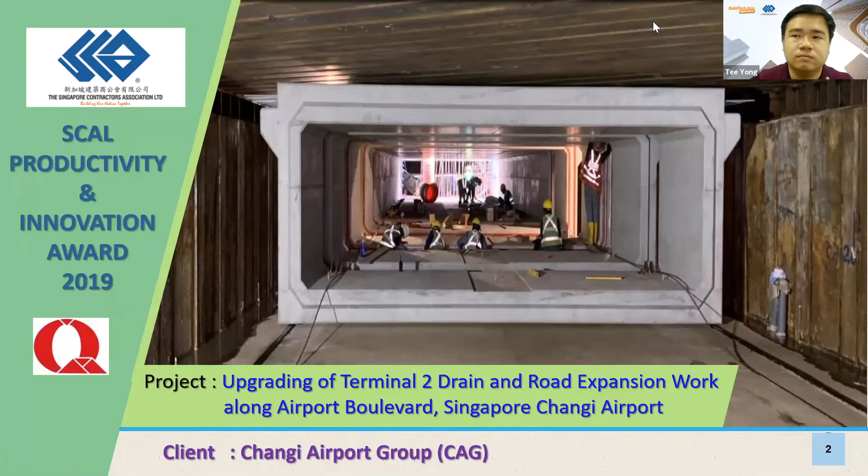So for this project, we are actually constructing a box culvert across Airport Boulevard. This is the plan view of the box culvert construction. We are supposed to construct a box culvert along both the city-bound and airport-bound directions.

So this is the length of the box culvert, which is about 51,100 mm across, going towards the direction of the airport and the upcoming Jewel during that time.

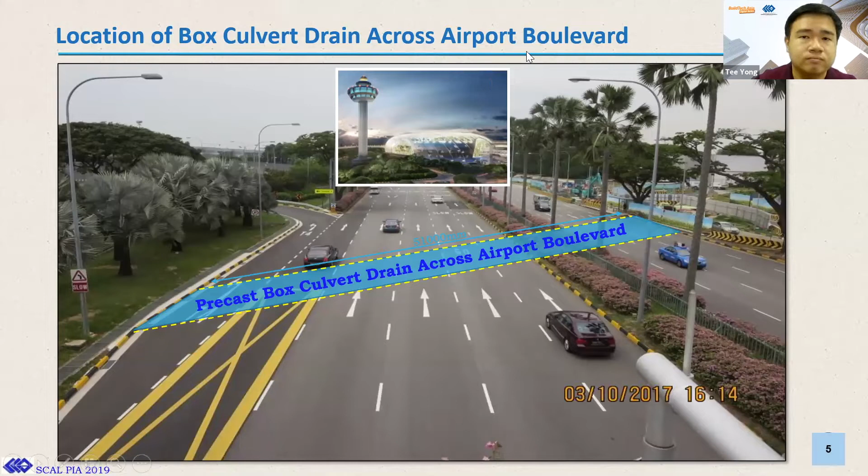So the first initial method was using the consultant proposed method, which is the conventional way to construct. In this design, it consists of a lower part precast box culvert followed by an upper part box culvert installation. The top of the culvert is actually higher than the existing road level for this design.

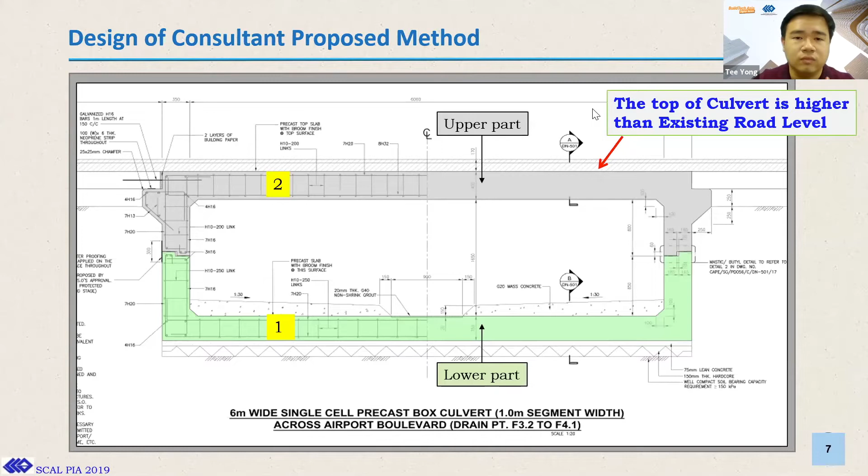So by using this conventional method, we are supposed to do the installation of temporary decking, followed by the removal of decking for excavation, and then proceed with the excavation to required level. Then the delivery of the lower portion of the box culvert, followed by backfilling, and then we proceed with the installation of the top section of the box culvert.

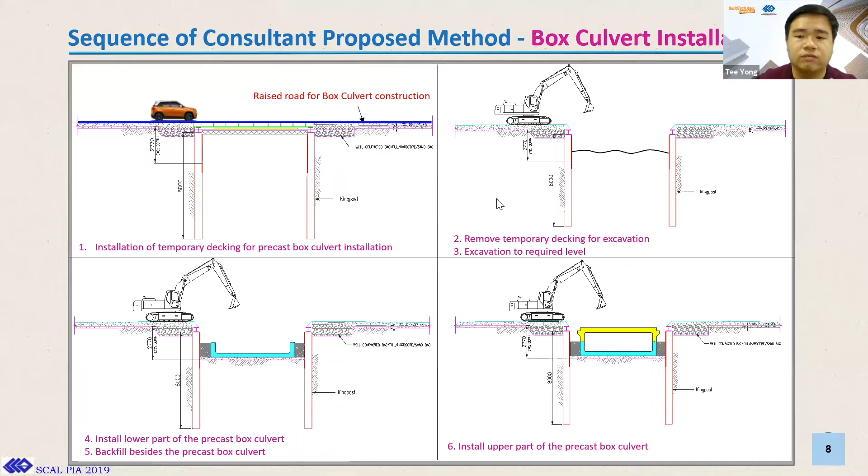Next, we will proceed with the placing of the back decking system to open up lane for traffic, and then laying of premix over the decking. And then we follow by removal of decking and premix to continue work and backfill to the approach slab level.

During this portion, it is the most intense and time consuming due to the opening and closing of the traffic to allow for the next day operations. So this is part of our constraint for this project.

So on the last portion, after the completion will be the removal of the king post and steel plate, followed by the installation of the approach slab, and then the reinstatement works, which consists of the milling, patching to proposed level.

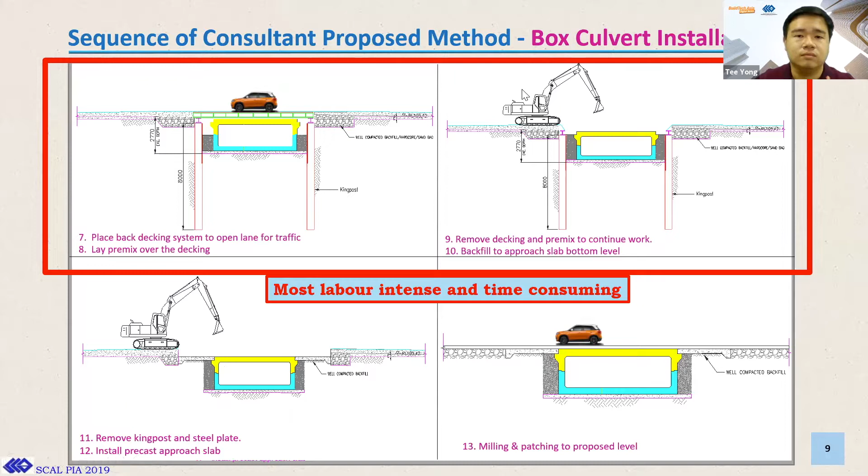Okay, so some of the challenges that we are facing, we have 4 main challenges if we are using this conventional method to construct the box culvert across along this airport boulevard.

First will be the repetition works, which we require to remove and reinstall back premix and decking, and follow, as we need to follow the permissible lane closure and lane open timing to maintain the traffic flow.

Next will be the allowable lane closure timing, which is restricted, given to us. For day works, we are only allowed from 10 a.m. to 4 p.m. for work, and for night works, we are only allowed from 1 a.m. to 5 a.m. So due to all these restrictions, there is a lot of repetition works required during our construction works.

Next will be, if you look at the layout plan, this drain alignment is actually not perpendicular to the existing lane. So by using this method, we are affecting not just one lane in order to construct one box culvert. By constructing one box culvert, we actually require to close more than 2 or 3 lanes.

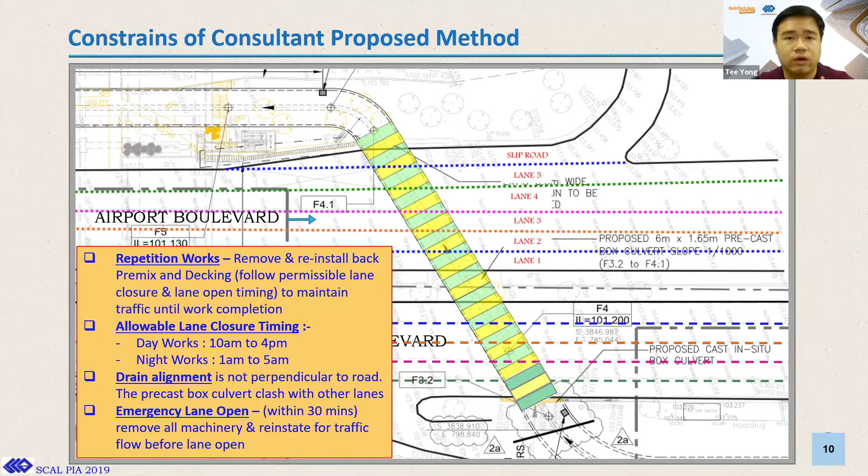And the last point will be the emergency lane opening. We actually have to open up the lane within 30 minutes in case of emergency. So removal of machineries and reinstatement work for traffic flow before the lane opening will be a big challenge to us as well if we continue to use this conventional method.

So we have plotted up a graph to analyze our challenges. In terms of method, if we proceed to use the conventional way, the impact will be due to the small work window allowed by our client. And in terms of environmental, we are only allowed to close 2 lanes at any one time. So this method will not be feasible for us.

In terms of machinery and manpower, it will be a challenge to us also, as using this method will require us to do a lot of repeated steps for the opening and closing and the reinstatement work, as we need to reinstate the top layer before we are able to open up to the traffic. So all in all, if we proceed with this method, there will be impact to the existing traffic and also operations going to the Changi Airport and the upcoming Jewel during that time.

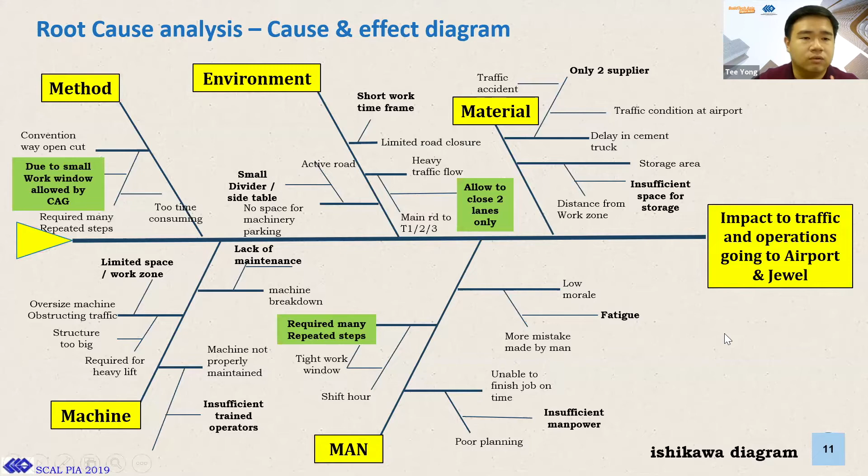So we analyze the root cause. We input 4 main points mentioned. The root cause will be restricted work windows given by our client, as this airport boulevard along this road is a very important stretch going towards the airport. And for these works there, we are only able to close up to 2 lanes.

And due to the repetition works, road closure is also a big challenge to us. And we are also subject to airport emergency. We need to evacuate within 30 minutes so as not to affect the traffic flow. So all these 4 main points are a main challenge for us, and the undesired outcomes will be delay to the upcoming Jewel opening during that time, and we will be facing LD from client and poor productivity.

So we have come up with a solution, which is to abort the conventional method and avoidance of above ground works, and explore an underground method. What we have come up with is an innovative method, which is the pull and rail method. By using this method, we have no restriction to 24/7 operations, so we are able to proceed with excavation works and installation of precast without being affected by the restricted work windows and closure timing.

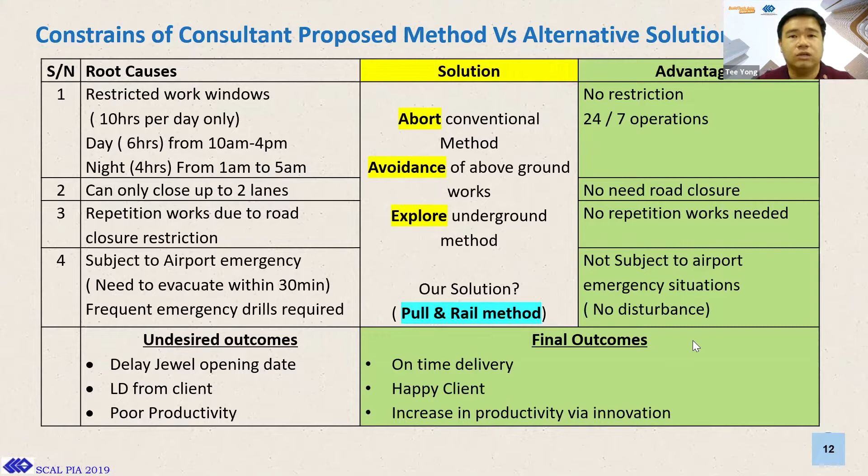As mentioned, no need for road closure, no need for repeated works, and not subjected to airport emergencies. The final outcomes will be on-time delivery and satisfaction from client, and increase in productivity through innovations.

So let us go on to our innovative method. This is what we have come up with, which is using this pull and rail sliding method for our full cell box culvert. The previous method was actually a lower portion and upper portion precast box culvert, but this time round, instead we are using a full cell box culvert, which also helps us increase our productivity.

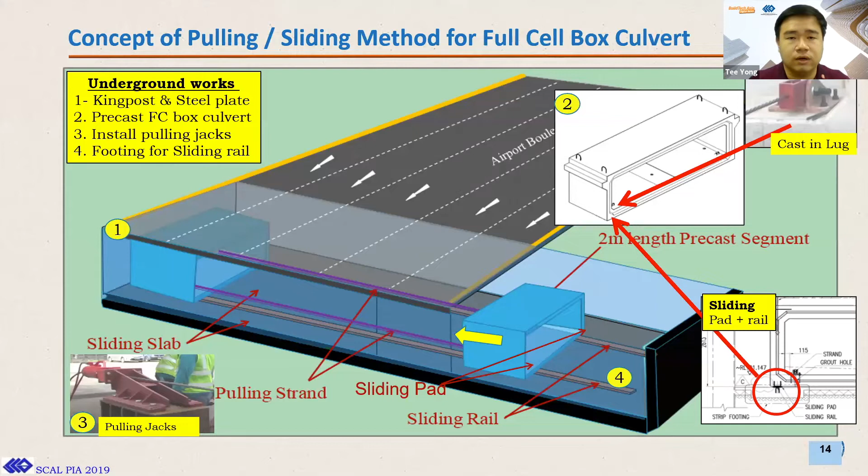So the first step will be the installation of the king post and steel plate, followed by number 2, which will be the precast box culvert, delivery of the box culvert to site to the receiving shaft. And below the ground, we will be doing the installation of the pulling jack and preparing the footing for the sliding rail. The next few slides will explain how these things work.

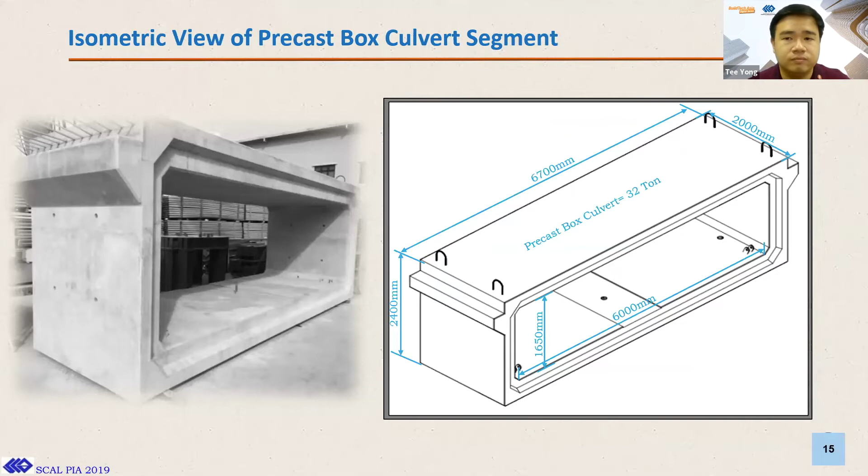So the box culvert segment is 6700 mm by 2400 mm. Each piece of precast box culvert is estimated to be 32 tons. Similarly, this box culvert's top is actually higher than the existing road level, so our temporary works are actually much higher than the existing road level.

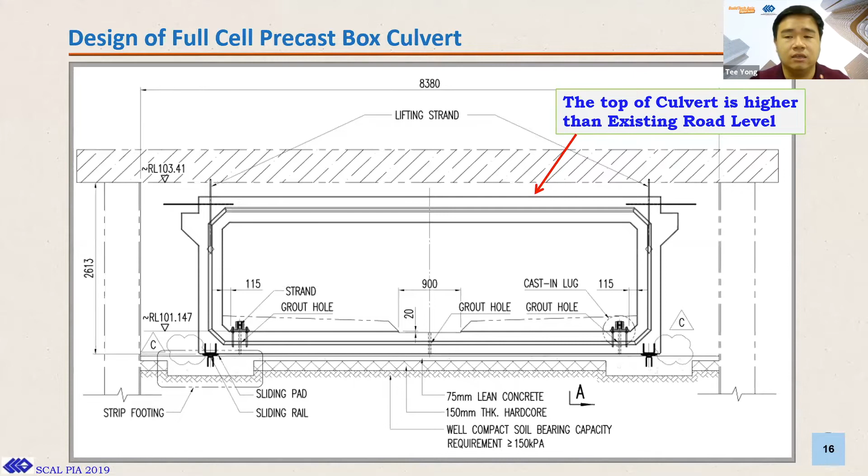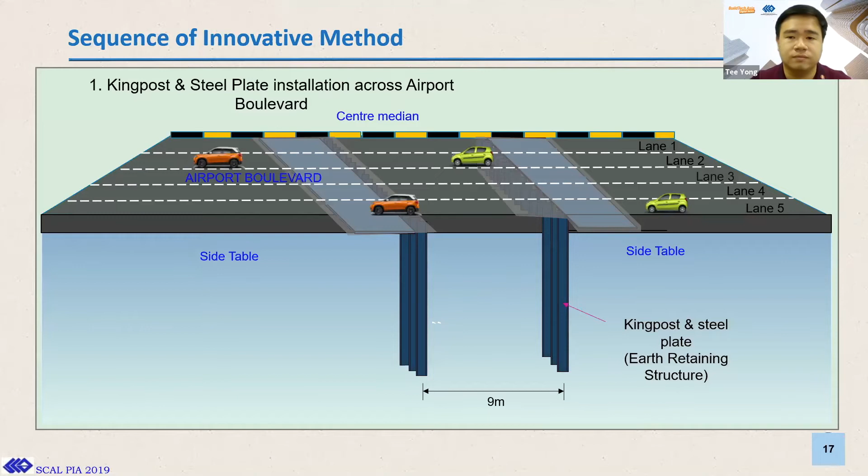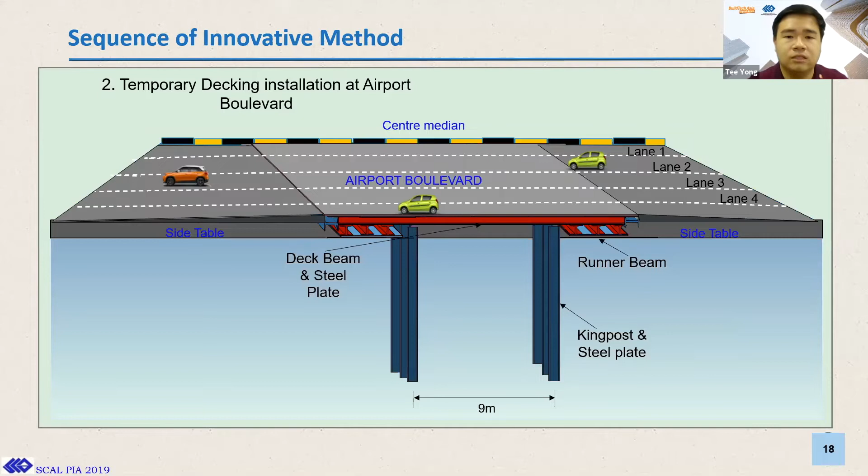After the installation of the king post and steel plate, we will proceed with the installation of the deck beam and steel plate and runner beam at the top. Once we complete this portion, we are able to do our excavation under the ground and also proceed with the installation of the box culvert, without affecting the existing traffic flow anymore.

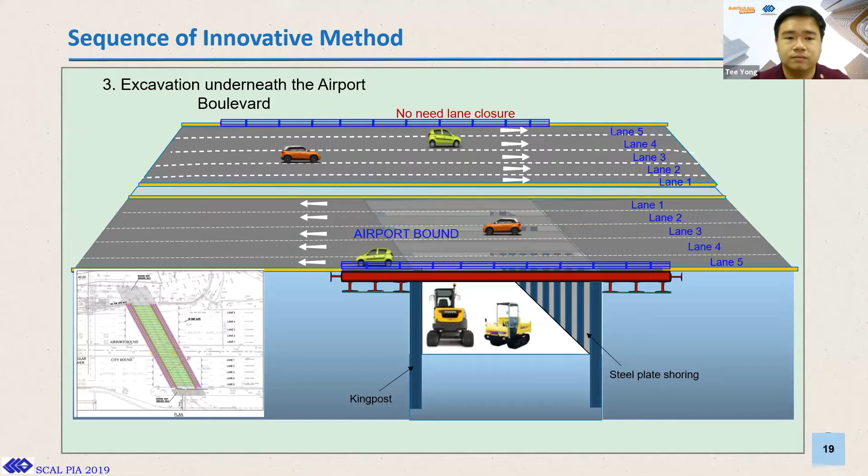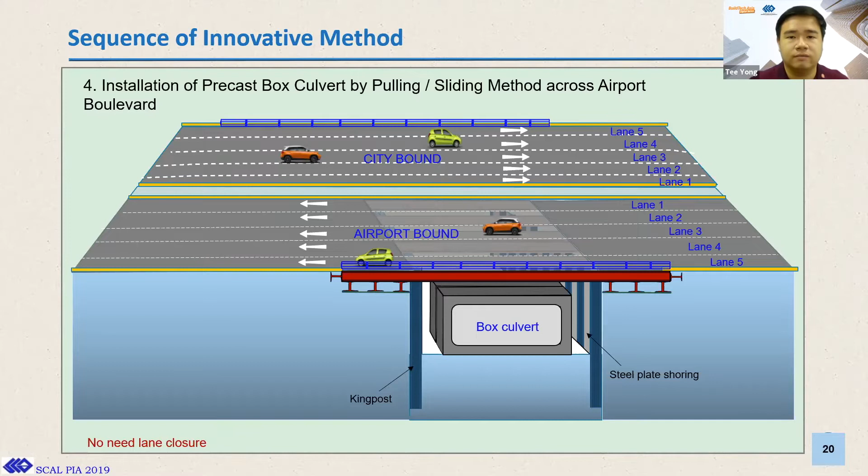So once the box culvert is delivered to the site, it will be placed down from the receiving shaft and then pulled in using the sliding rail and pulling jack. Once it's complete, we will proceed with the removal of the steel plate decking and then complete the reinstatement works.

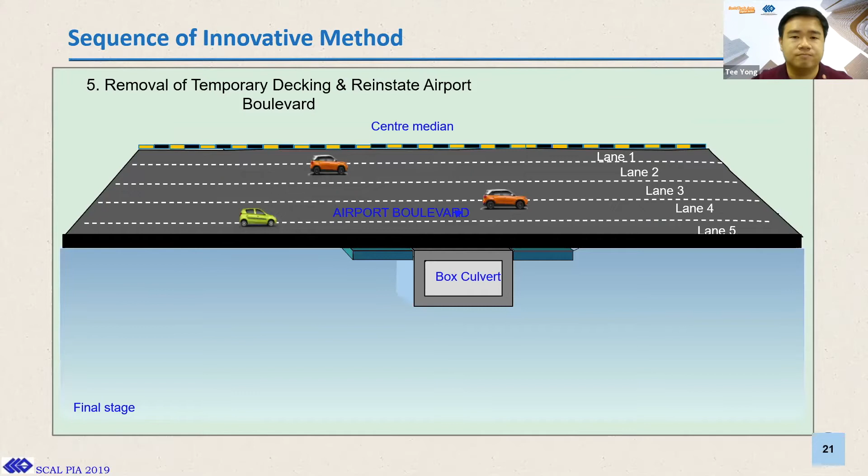So let us do a comparison of the consultant proposed method and our innovative method. As mentioned, the 4 main points: by using the conventional method, there will be repeated steps. But by using our method, the decking and premix is only installed once and there are no repeated methods as the opening of decking is no longer required.

By using the conventional method, we actually have to open up and close even for the excavation and for the placing of the precast segment. But by using this innovative method, after we install the decking, we no longer have to open up the decking as we can do our works underground.

So the next point will be the lane closure timing. If we are using the conventional method, we are restricted. But by using this innovative method, works is carried out beneath the road and we are not restricted by the lane closure timing anymore during the excavation and the installation of the box culvert.

For drain alignment which is not perpendicular to the lane of the road, box culvert installation must not overcross the lane with traffic next to it. But by using our innovative method, the installation of box culvert fitting within the lane width is not required because we are doing our works underground. Similarly, for point number 4, we are not restricted as we will not be affecting the ongoing live traffic flow.

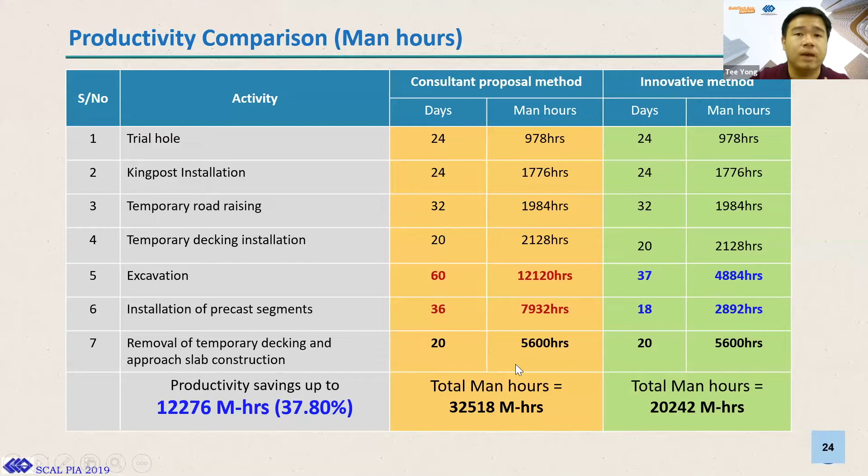Next, we will go on to asphalt saving. Similarly, for point number 5 and 6, if we are using the conventional method, we have to open up and close back the decking, and then do the reinstatement work every day in order to proceed with the excavation and installation of precast segment. But by using this pulling rail method, the excavation and installation of precast segment does not require us to open and close the top decking, so this portion does not require reinstatement work. Therefore, for this portion, we do not require any asphalt here.

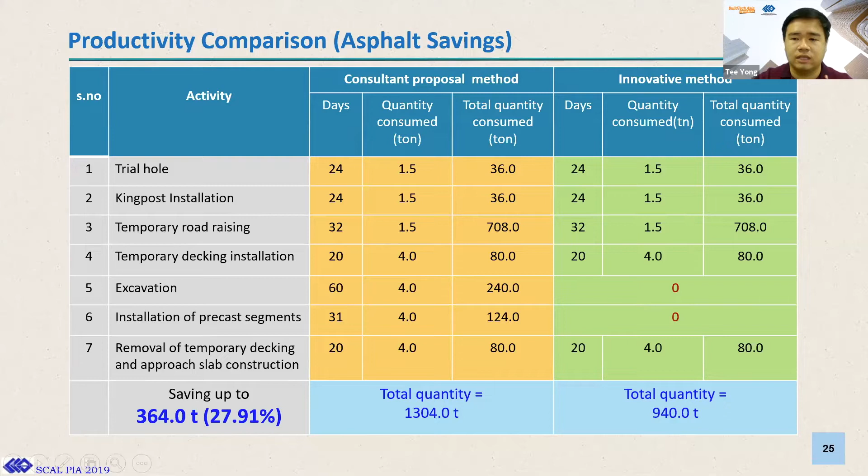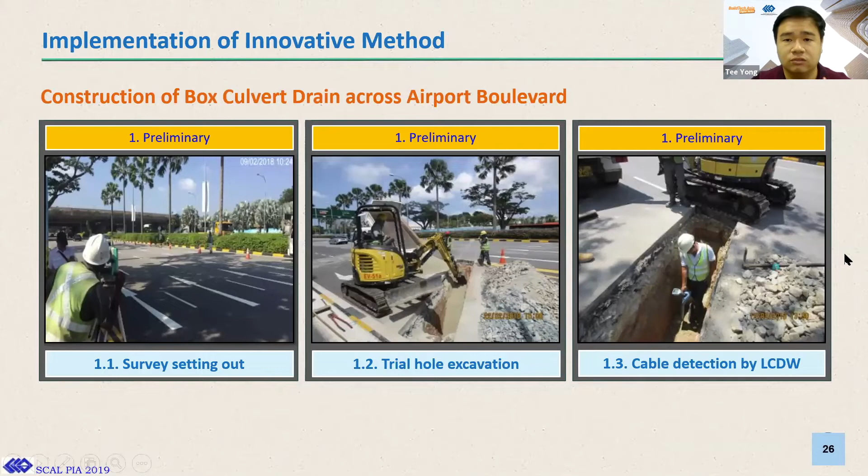So let us go on to some actual photographs of the innovative method. First, we proceed with the survey setting out, followed by trial hole excavation and cable detection by LCDW. As this drain alignment is not perpendicular and is slightly slanted, the alignment and precision has to be very accurate for us to install the I-beam.

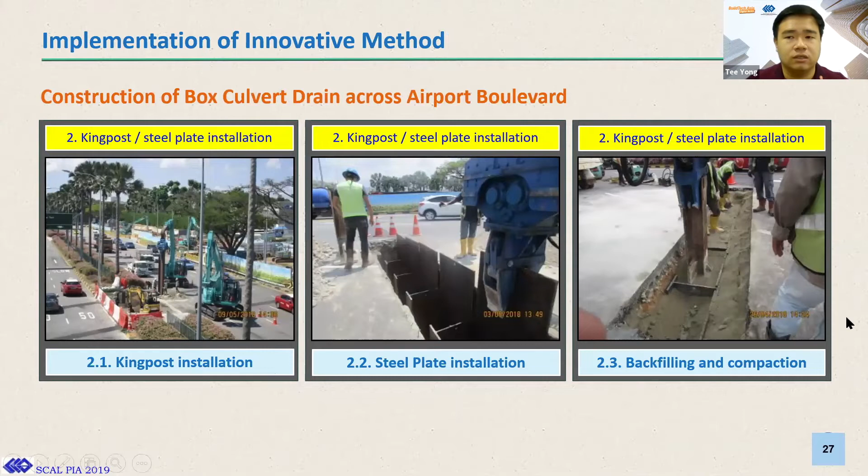Next, we will proceed with the installation of the king post, steel plate installation, and backfilling work and compaction. After we finish the installation of the king post, we will proceed with the decking - delivery of the decking, then installation.

As you can see, the decking is actually much higher than the existing road level because the top cover is higher. So once we proceed, this will be done progressively lane by lane. After we finish one lane, we'll go on to the next lane to install the decking.

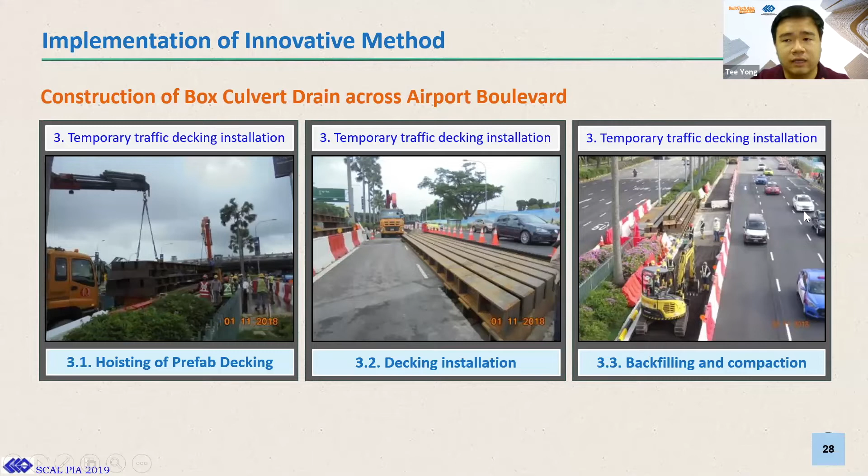After the installation of decking, the excavation works and installation of the precast box culvert will be underground. So this portion will not be affected by the existing live traffic flow at the top.

For excavation, first we proceed with the excavation, shifting the excavated soil to the shaft for removal. Once we complete this, we'll proceed with the casting of the slab and preparation of the pulling rail.

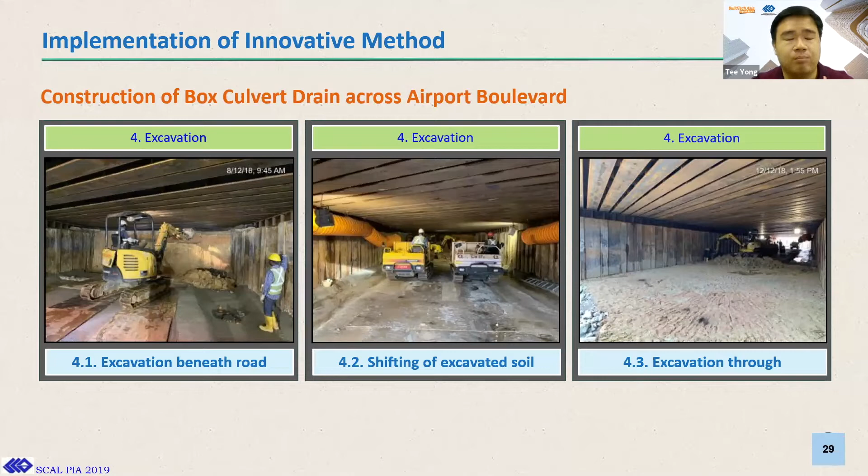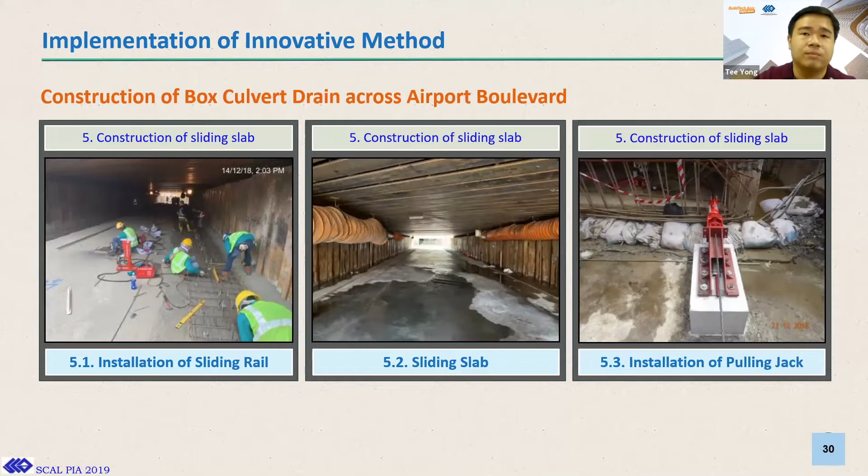On this portion, the alignment of the two rails and the placing of the box culvert on the rail has to be very accurate and precise. The pulling speed of the rail on the two sides using the jack has to be very accurate, and the timing has to be very precise as well.

After the box culvert is placed on the rail, we will proceed with the connection of the jack and strand to the precast box culvert, and progressively each piece of the box culvert segment will be put in.

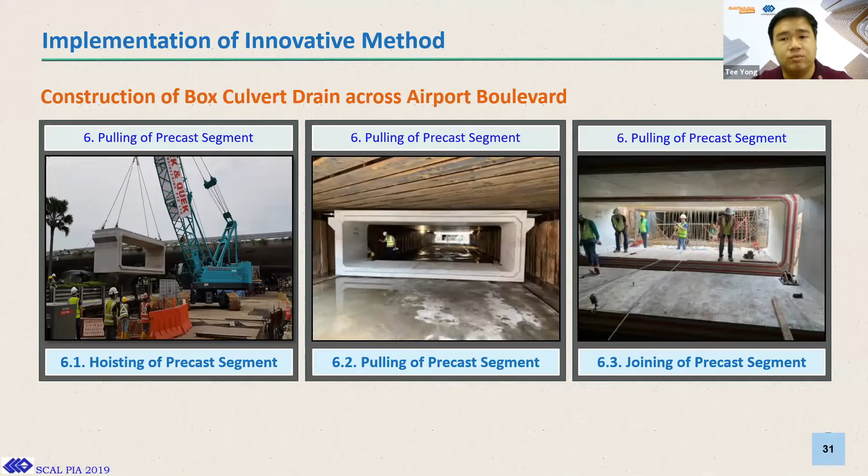After we complete the excavation work and the delivery and installation of the box culvert, the remaining works will be the reinstatement works, which is the removal of temporary toppings and temporary decking, followed by the removal of king posts.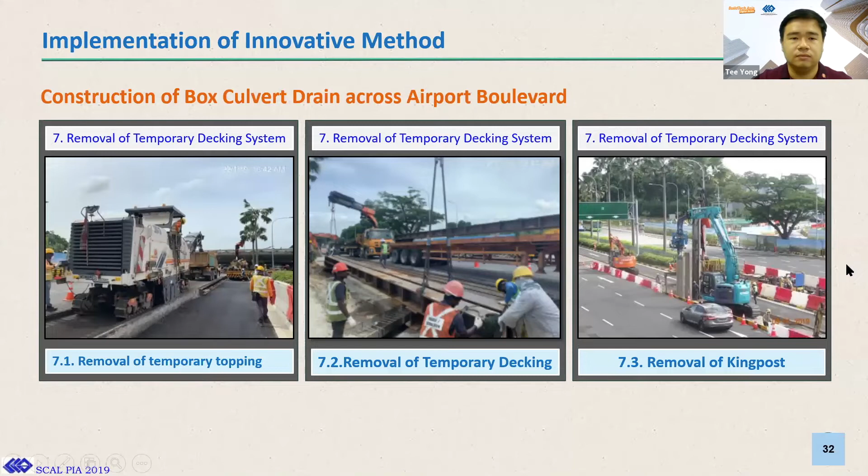Once we complete the removal of king posts, we proceed with the compaction works and delivery of the precast approach slab.

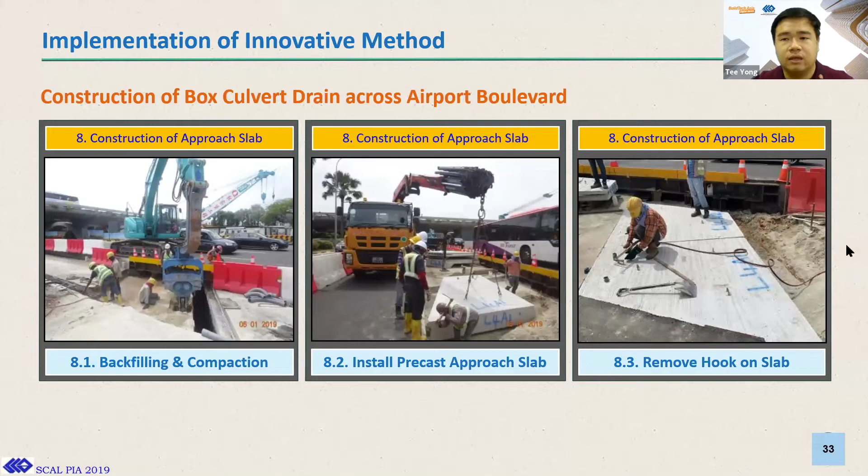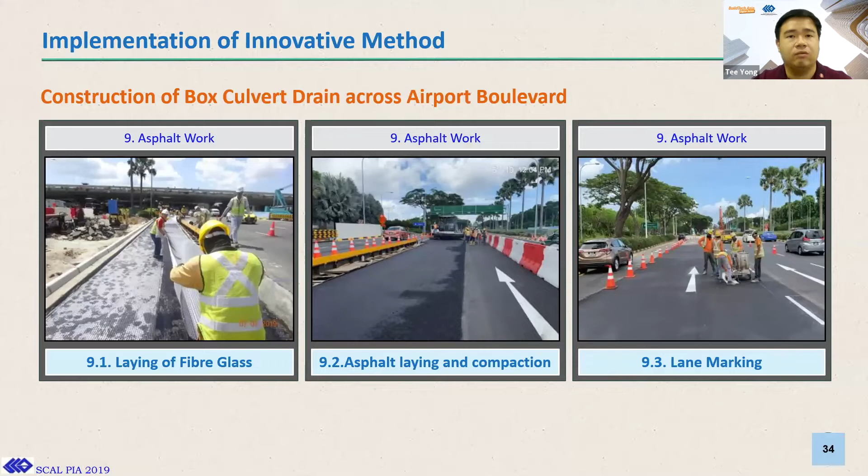We then complete the final stage, which is asphalt laying and compaction, followed by lane marking and the road being ready for usage. During our construction of this precast box culvert, various agencies like the BCA also visited the site to take a look at our innovative method for constructing the box culvert across Airport Boulevard.

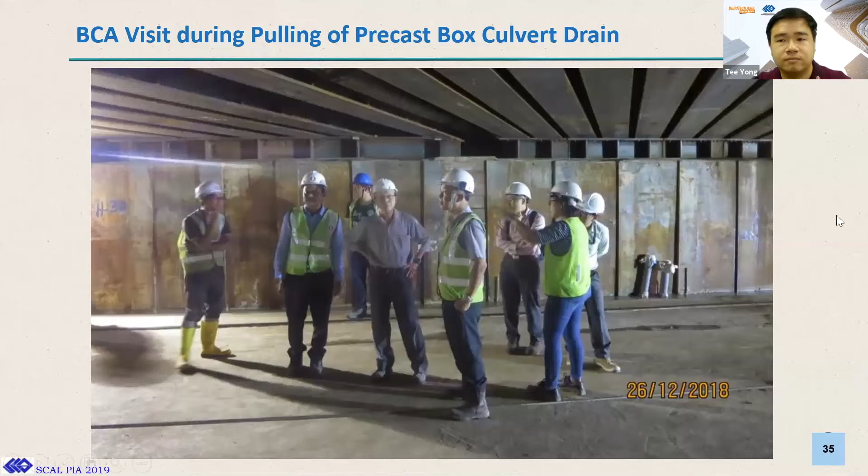So this is the final slide. In terms of tangible benefits, man hours, we are talking about a saving of 147,000. And in terms of asphalt saving, we are talking about 28,000. But the major item will be the LD avoidance, which is we're estimating about 30 days times 6,000 per day, which is 180,000. Total estimate, we are talking about 355,000 of savings by using this innovative method.

In terms of intangible benefits, this method has helped us to enhance our corporate values and mindset change as we are able to embrace innovations and enhance engineering competency, and it's extremely high operational worth as we are able to also use this similar method to other upcoming projects.

And in terms of environmental sustainability, we are able to minimize the resource consumption and maximize resource reuse. We are able to reuse the asphalt.

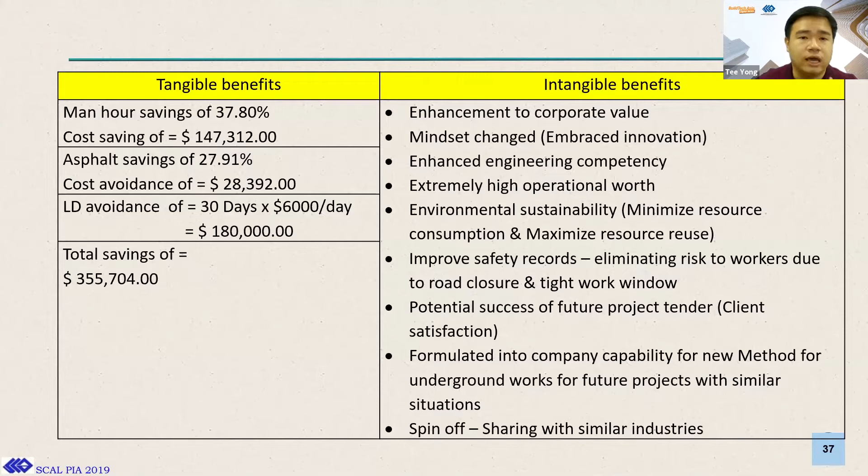Thank you very much, Yong. Excellent project, and I think it's an incredible example of innovation processes to overcome engineering challenges, clients' requirements, and productivity improvement. Also, the impact on the traffic to and from Changi Airport, and I believe at that time it was also near the opening of the Jewel, so the traffic must have been quite heavy.

We have two questions, and I'm not sure whether you have answered them in your presentation. It says, Mr. Tan, this question is from Ho Yong Tan. Mr. Tan, your productivity increased 37%, which is good. What is the overall cost comparison like? And the second one from Alex Lay, did you guys do a cost comparison? I think you might have already answered that in your presentation.

Okay, in terms of cost comparison, it's actually an estimate, because we understand that by using the conventional method, definitely the project will be delayed because of this restricted time and restricted working hours for us to complete the project. We are only taking an estimate LD time of 30 days, so we are able to come up with the savings, which is 355,000. But if we are using this conventional method, the construction of box culvert may actually exceed more than 30 days of LD, which in the overall cost for this project may actually exceed.

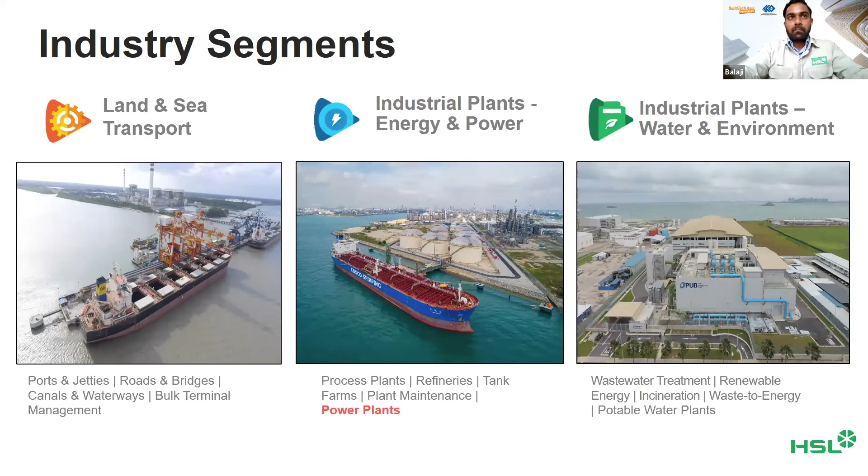First, I want to explain the schematic layout of a typical seawater intake outfall system. Where is this intake outfall system being used? Almost all power plants with gas-fired turbines, coal-fired turbines, desalination plants, cooling water for power stations, firefighting, industrial use, feed water for steam turbines, nuclear power systems - all these industries have the intake outfall system.

What are the various types of intake and outfall systems? Intake and outfall can be achieved in various ways: through box culverts, through reinforced concrete pipes, GRP pipes, high density HDPE pipes, and the last method is the open channel method.

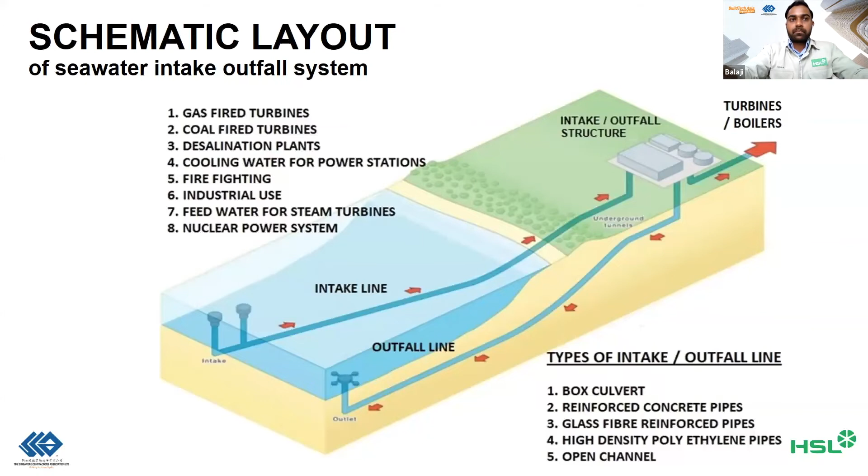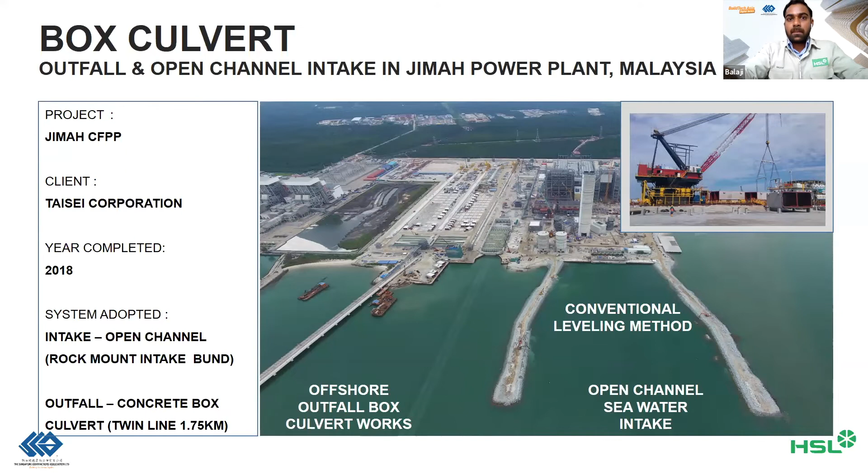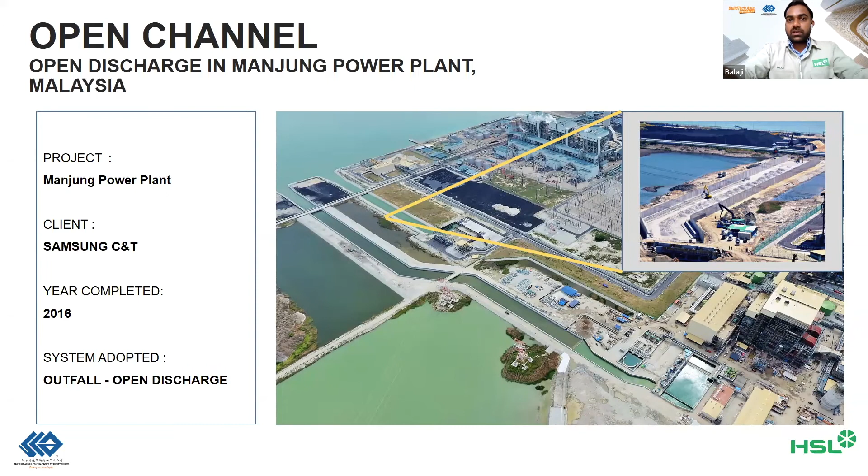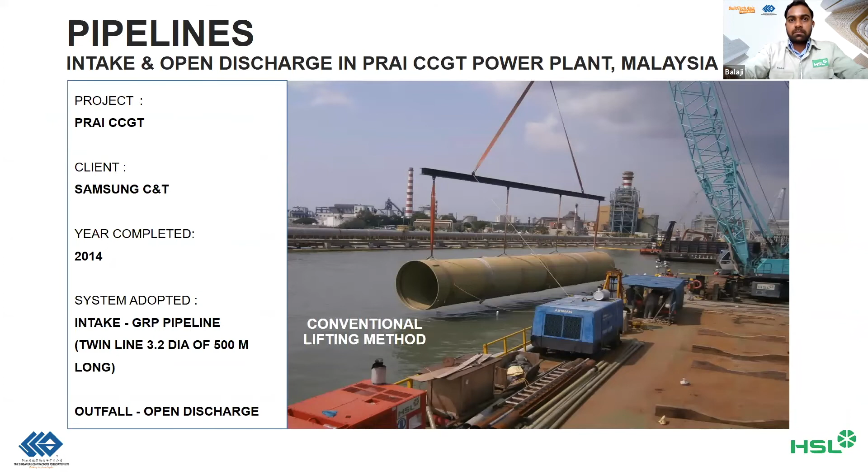We have faced some difficulties and challenges in all these power plant projects. First I would like to explain the challenges we faced in Jimah power plant. There, we did the conventional bedding - for pipe or box culvert installation, the seabed needs to be leveled properly using stones or gravels. We used the conventional type of bedding with a crane barge, but the disadvantages of this system are turbidity effect, inaccuracy, and high wastage of materials.

After doing the bedding, we need to do the leveling. In order to place the pipeline or culverts in position, the seabed needs to be leveled properly. Initially we used divers to go and do the leveling manually, but this was time consuming, the precision was low, and it exposed divers to high risk.

After seabed leveling, we need to install the pipelines or box culverts in place. In this project, as mentioned, these are 300-ton culverts, so we used heavy lifting equipment - conventional cranes - to install them. We used 4 tugboats because the barge was bigger in size due to the heavy load of the culverts, requiring big crane barges. This created marine safety hazards because of the big sizes of the barges and tugboats, which were deeper in draft, requiring a deeper jetty and more dredging for the temporary jetty to park these crane barges near the shoreline.

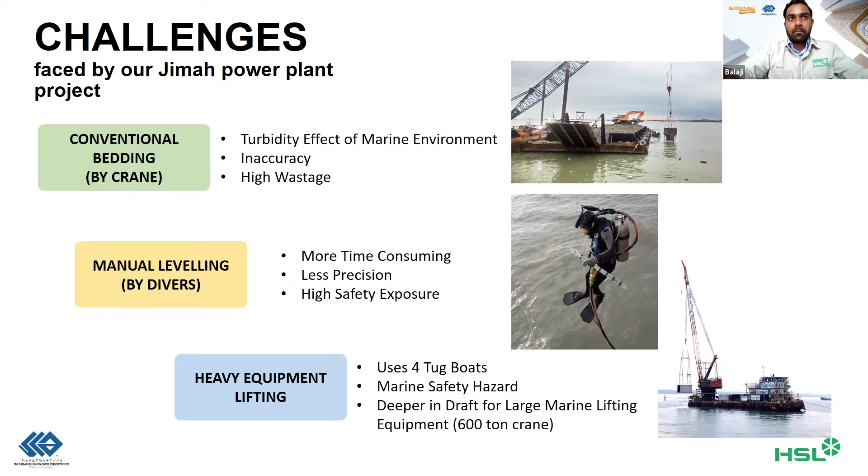So we decided it was time to put our heads together and bring some innovative solutions to construct this kind of box culvert and heavy lifting objects. Our main objective was to improve the process by reducing manpower, reducing equipment usage, and minimizing time.

Second, we aimed to develop new methods - using louvers for bedding. Later I'll show you some pictures and videos, as well as using multi-screw levelers, developing GPS positioning for accuracy, and using a multi-beam surveying system to analyze and predict the seabed.

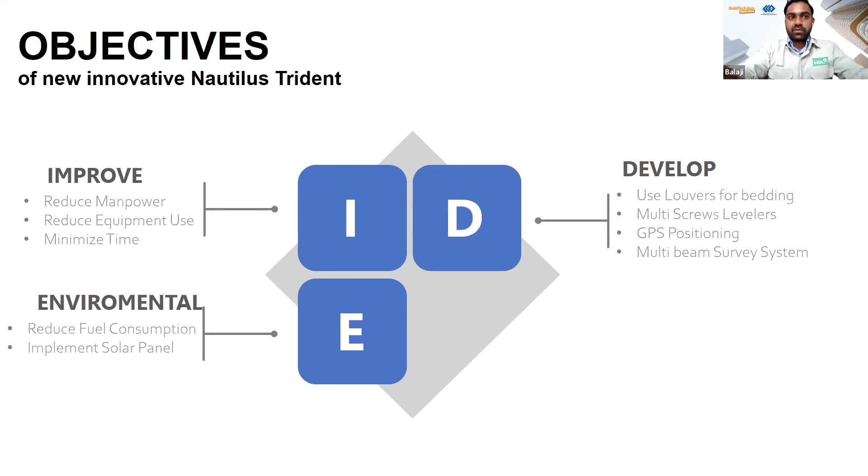Third, it should be environmentally friendly. To be environmentally friendly, we need to reduce fuel consumption first, then implement solar panels.

Fourth is our objective of advanced safety systems: to minimize diver deployment, have live monitoring and real-time surveillance systems, and minimize tug movements. As mentioned, we need 4 tugboats to handle the bigger barges, and to eliminate poor diver visibility, which is a common problem in offshore working during installation of pipelines or culverts.

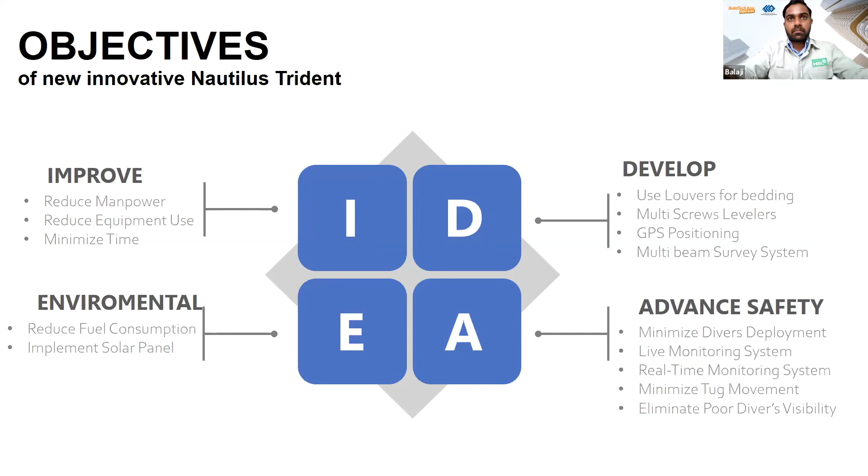In May 2018, we held a brainstorming session to find a new innovative solution for box culvert installation. In June 2018, we were awarded the next project, the Malacca project.

In July 2018, the design of the innovative Trident was finalized. In August 2018, we started fabrication and shipbuilding activities.

In January 2019, we successfully launched our Trident. In February 2019, we mobilized our Trident to the work site and started our work.

Let us look at the Trident barges. There are three in total: the bedding barge, the leveling barge, and the heavy lifting barge.

Let's look at the bedding barge first and its advantages. This is the Trident bedding barge. It has louver gates opened by a hydraulic system, which supports uniformity in bedding.

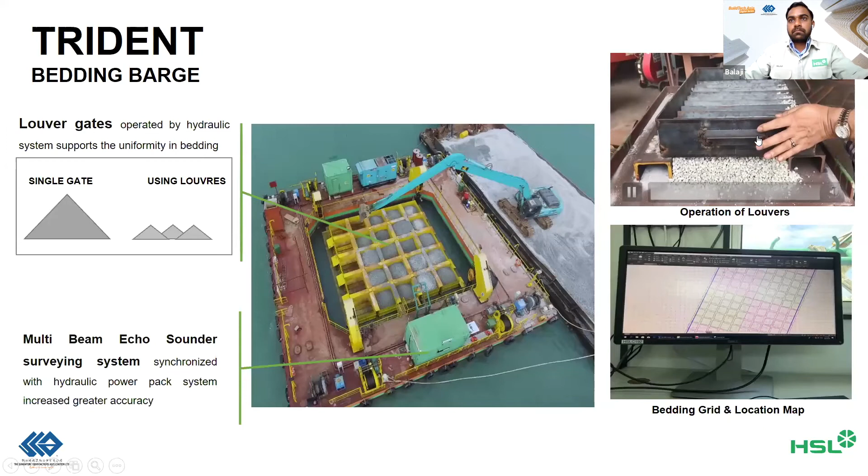You can see the advantage of the louvers here. On the top right side, you can see the louver working system. This is the model we demonstrated before proceeding with the innovative Trident.

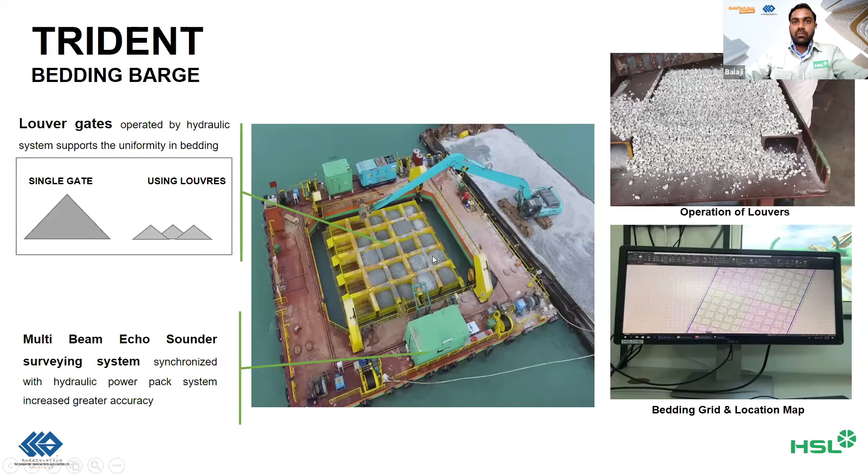You can see the evenness during bedding. The same system applies to this bedding barge. We plot the bedding grids in our layout, and using the echo sounding system, we measure the quantities to put into each box, then the bedding frame is lowered down.

Second is the Trident leveling barge. After bedding, we need to do leveling, because in order to minimize the ups and downs in the bedding, we use the leveling barge to level it.

This system also underwent continuous improvement. Initially we used a blade kind of leveling system. After that, we innovated and continuously modified our system to increase accuracy and efficiency. In March 2019, we went for the single screw leveling system, followed by the triple screw leveling system in June 2019.

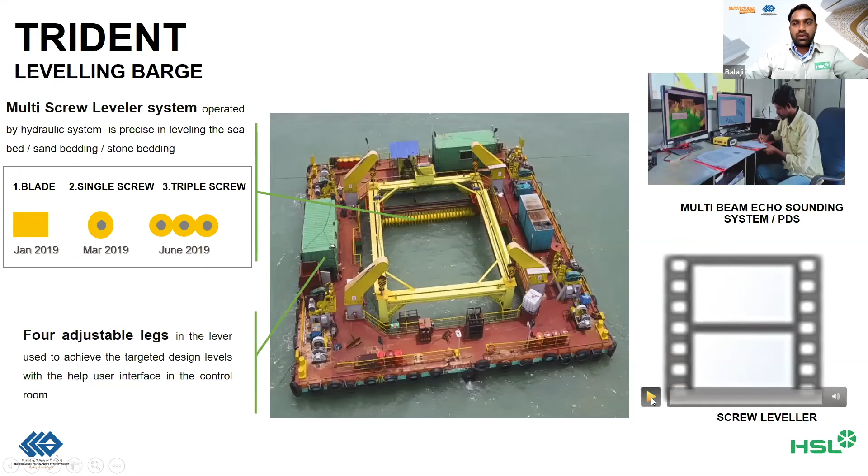You can see the 4 adjustable legs on the leveling barge, used to adjust to the required design levels. We can adjust all 4 legs using the hydraulic system, operated from the barge itself. Let me show you another video of how this leveler functions.

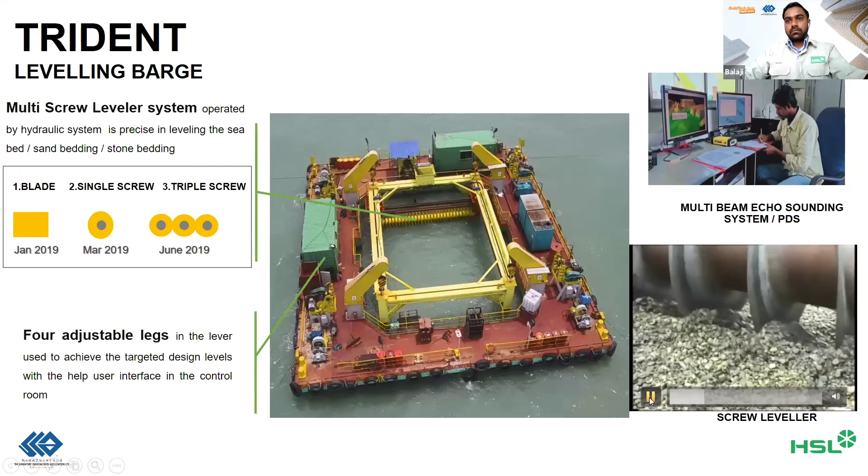Third is the Trident gantry barge, used for heavy lifting activities. There are many advantages to these barges and many innovative features incorporated into this design.

First, the gantry crane barge has a 550 ton safe work load with highly automated systems. Second is the rail cart of 500 tons, which you can see in yellow.

This rail cart is used to transfer the load to the prescribed location on the barge. You can place 4 or 5 cargoes on your deck, and this rail car system is used for carrying these loads towards the crane.

Third is the counterweight rail car system. In olden days, we used manual pumps and water for ballasting the barges to make them level properly during loading and lifting.

Now we have this counterweight rail car system, which is instantaneous. Based on the level and stability of the barge, the counterweight moves in the opposite direction to maintain barge stability.

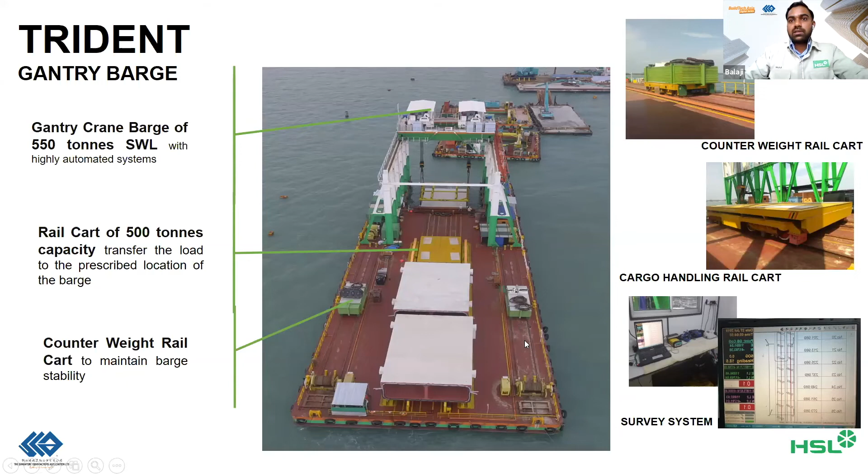These are other applications of the Nautilus gantry barge, or GB in short. It can install box culverts, intake headers, pile caps for bridges, beams, and even artificial coral reefs, which we used in our Singapore project.

So we also made a graphical presentation comparing the environmental cost efficiency of this Nautilus Trident with reference to the conventional projects, starting with fuel consumption. Here you can see the fuel consumption for the Trident barges versus the conventional systems. It decreased more than half compared to the conventional systems.

This comparison was made comparing our Jimah project versus our Malacca project.

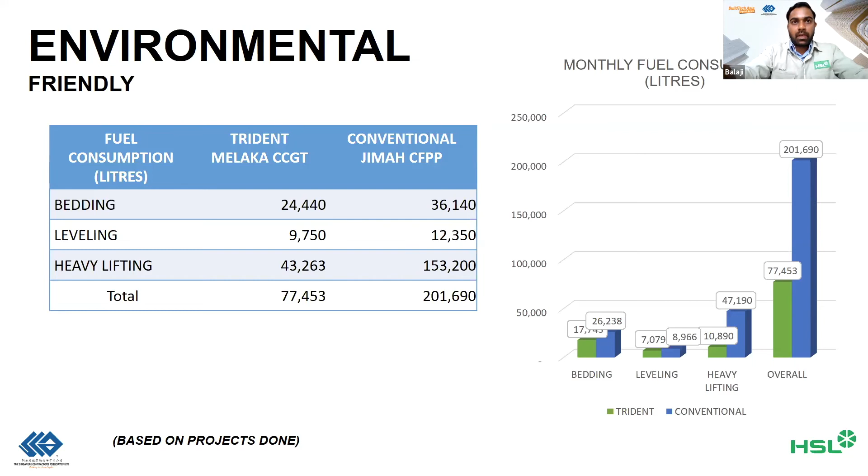Second is the number of equipments used. For bedding we have 7 numbers of equipment, whereas for the conventional system these numbers show how many equipments like tugboats and barges are needed. Overall it reduced about 20 to 25% of equipment for this Trident method.

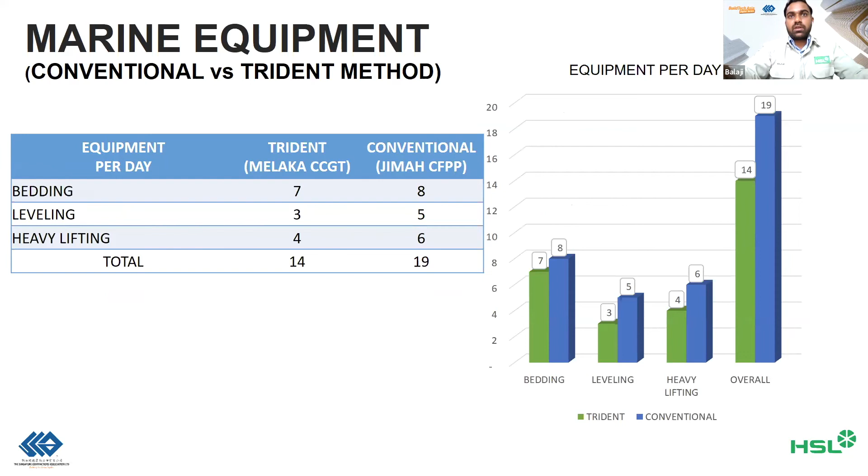Manpower: since the usage of divers is minimized, here you can see the numbers of manpower used for this Trident. Almost 35% of manpower is decreased by using this Trident.

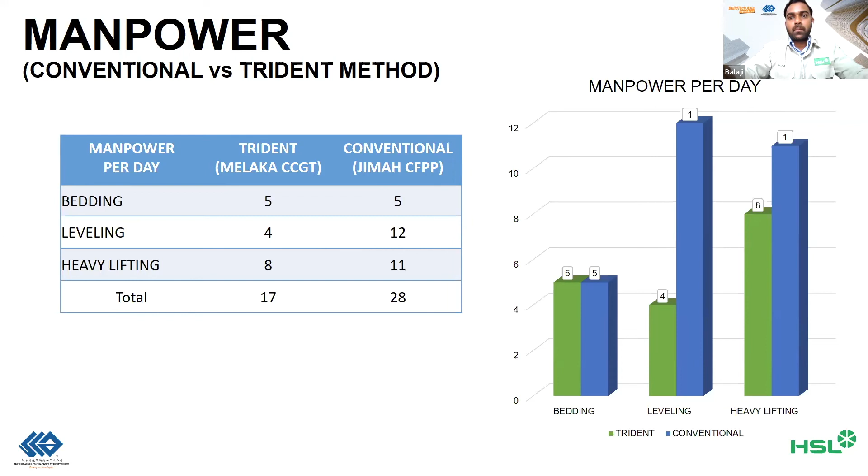For productivity, in the bedding activity we reduce almost half the time to do 100 meter square of bedding area, because in the conventional system manual cranes are used, whereas this bedding barge is much faster.

For the leveling, we use divers in the conventional system. Here we use a mechanized system and robotic equipment to do the underwater leveling.

Third is the heavy lifting. Here also our time is reduced by more than half for installing the culverts, since the barge movement is much easier compared to the conventional type of cranes.

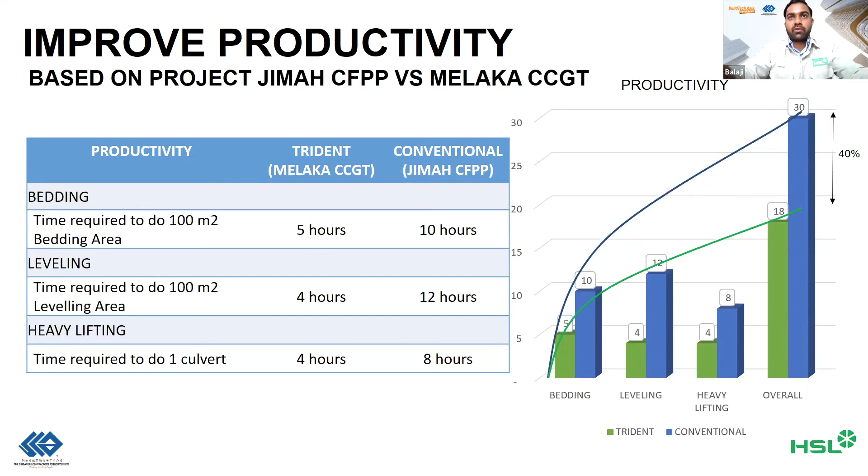This is the sequence we normally follow. Barge number 1 does the bedding, barge number 2 does the leveling, and after that we install the pipelines or the culverts. For this particular project we used culverts.

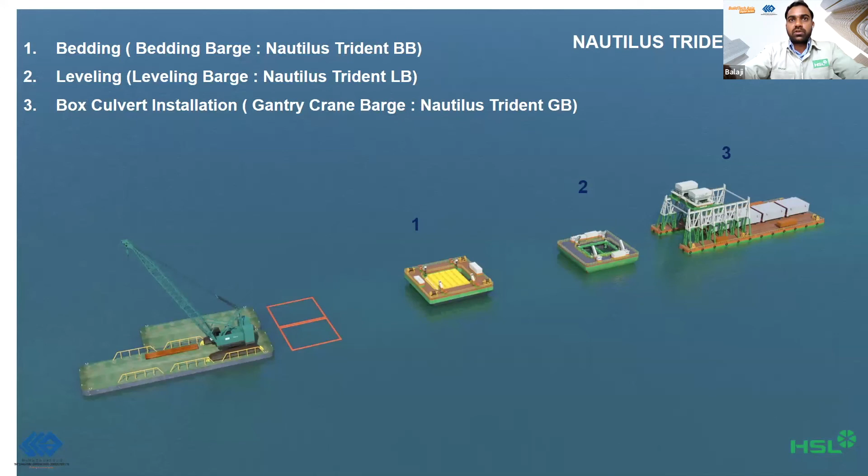I will show you a video.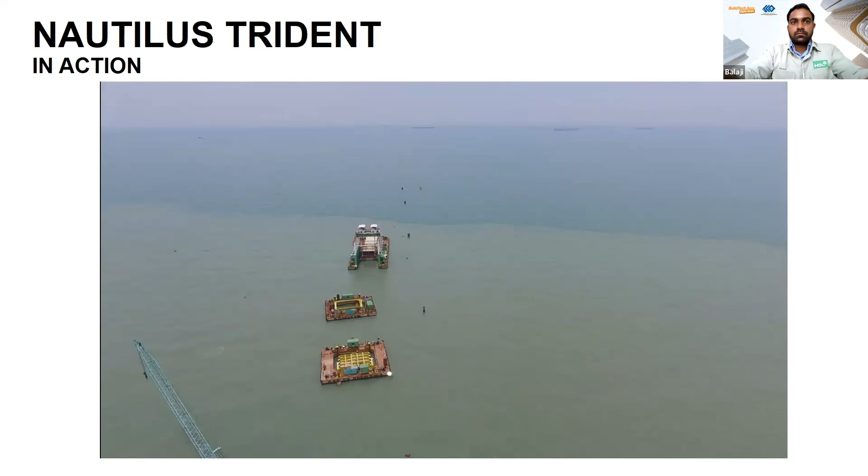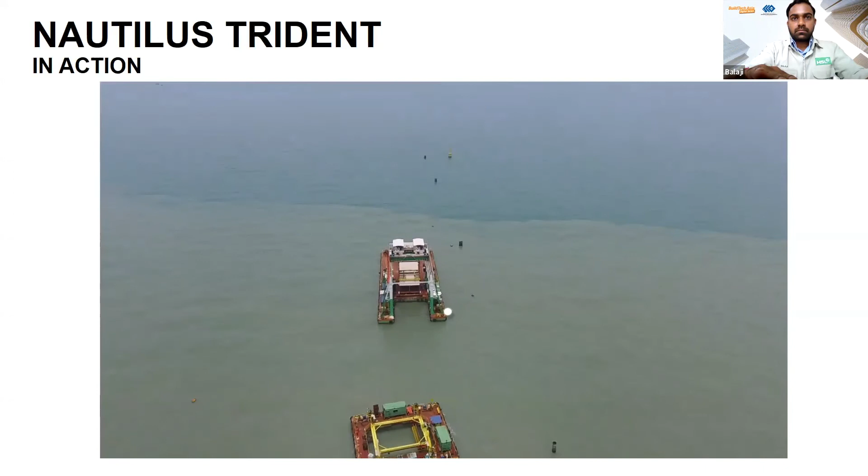First is the bedding barge. This is how we do the loading of materials, using the material barge alongside the bedding barge. Based on our survey calculation, each box's required quantity was already determined earlier, so we fill in the boxes accordingly.

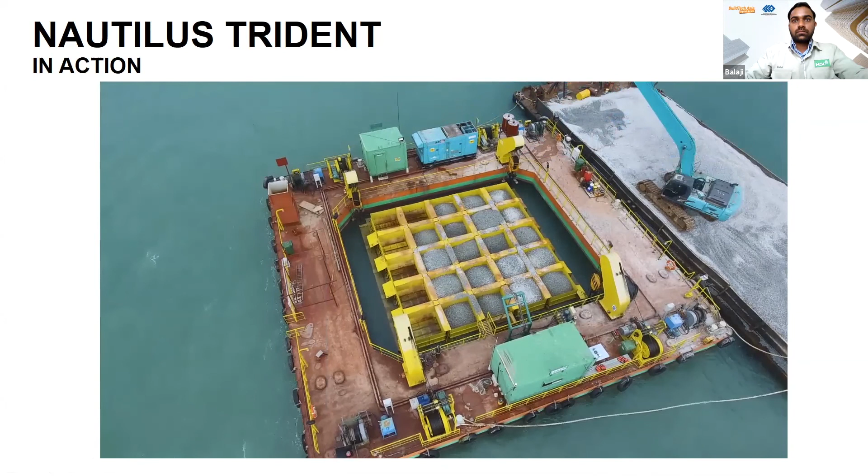After that we lower the frame as shown in the video, and we dump all the bedding materials in the trench.

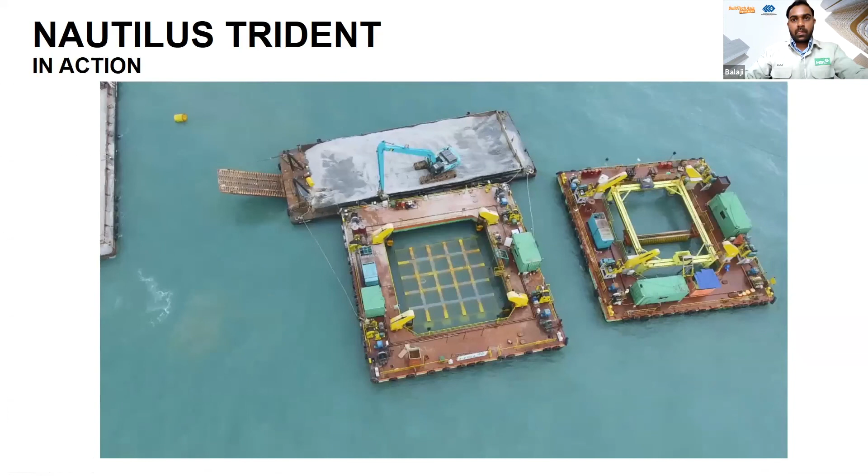After doing the bedding, we position our leveling barge based on the GPS positioning system to the exact location, and we do the leveling afterwards.

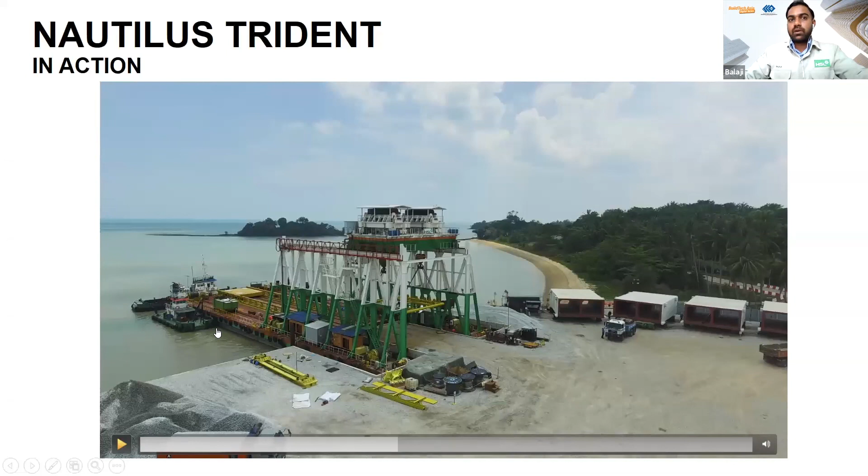This is our third barge, the gantry barge. Its draft is less than 2.5 meters, so it can navigate shallow water easily. Also, much less tug is needed to handle this barge compared to conventional crane barges.

I'm sorry Balaji, could you finish in about 2 minutes? Thank you. I'm sorry Balaji, can you finish in 2 minutes? Thank you. Okay, sure.

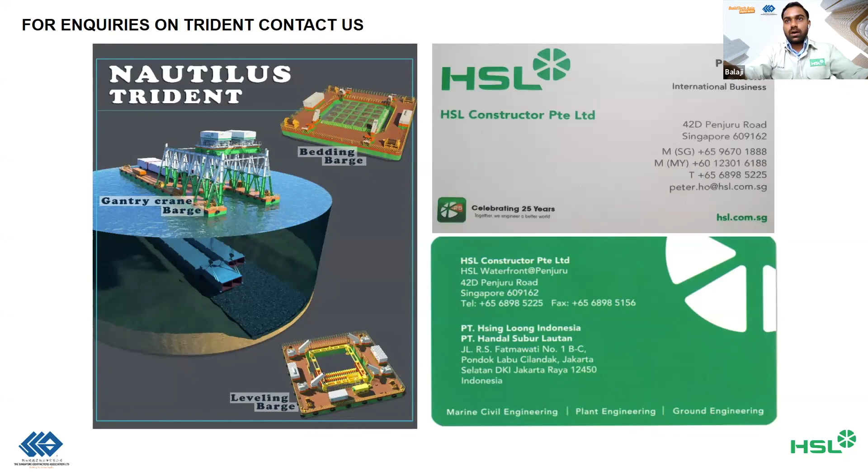These are some of the working pictures of our Trident barges. These are the references; for inquiries you can contact us about these barges. These barges are currently in Malaysia, but they can work anywhere. Thank you.